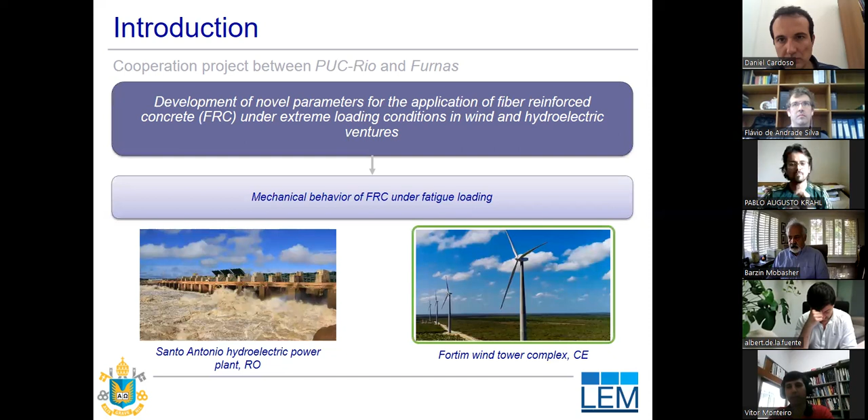This research is part of a major cooperation project between PUC-Rio and Furnas, which aims to develop novel parameters for the application of FRC under extreme loading conditions. This project was divided into two main branches: understanding FRC behavior under impact loading for hydroelectric power plants, and mechanical behavior under fatigue loading for wind tower endeavors, which is where my research project is part of.

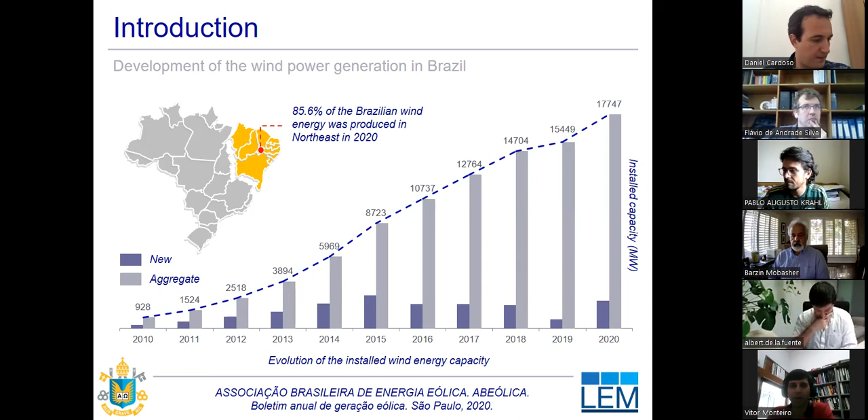There has been a major growth in the use of wind energy in Brazil over the last 10 years, with major growth in the production of wind power across our country. However, in the last 10 years, wind power generation has been majorly concentrated in the northeast of our territory, around 86% of all wind energy in Brazil is concentrated there at the moment.

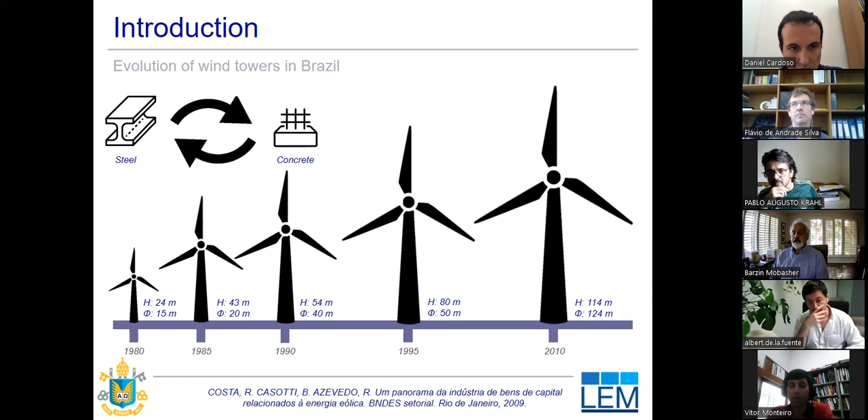In order to make those wind towers reach really high in the atmosphere and produce more wind energy, bigger blades and larger turbines are becoming bigger and bigger. Due to many problems in terms of vibrations from the high average speed of the wind, steel structures have not been the best option for construction of wind towers. Therefore, in the last decades, the major solution for this type of endeavor has been the use of reinforced concrete or pre-stressed concrete or a combination of both.

However, when we use reinforced concrete in situations with a lot of cyclic fatigue loading along the useful life of those structures, there is a major concern regarding cracking evolution and mechanical deterioration along those cyclic loadings over many years. Therefore, this research project aims to evaluate the use of fiber reinforced concrete and its mechanical behavior for this kind of application, and verify how fibers can mitigate mechanical deterioration along the useful life of those structures.

My research project was divided into five major sections. The research goes from the interface level, evaluating interface degradation at the fiber level, to mechanical characterization at the material level, and finally to verify the structural behavior under fatigue loading with additional fibers. Along our research, we also propose some novel models for FRC fatigue and evaluate the bond-slip behavior with some novel analytical equations.

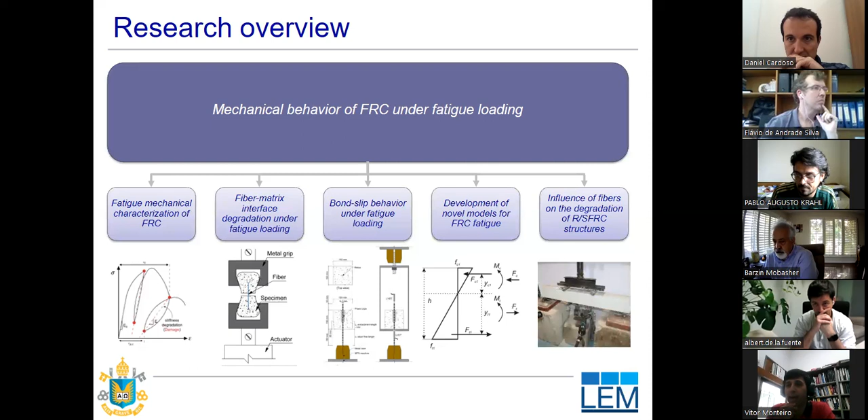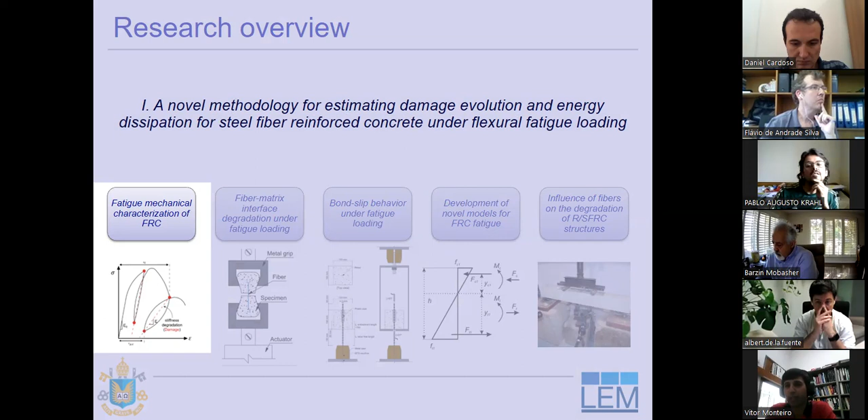For my first section, we'll bring the main results for the flexural fatigue loading of FRC at the material level.

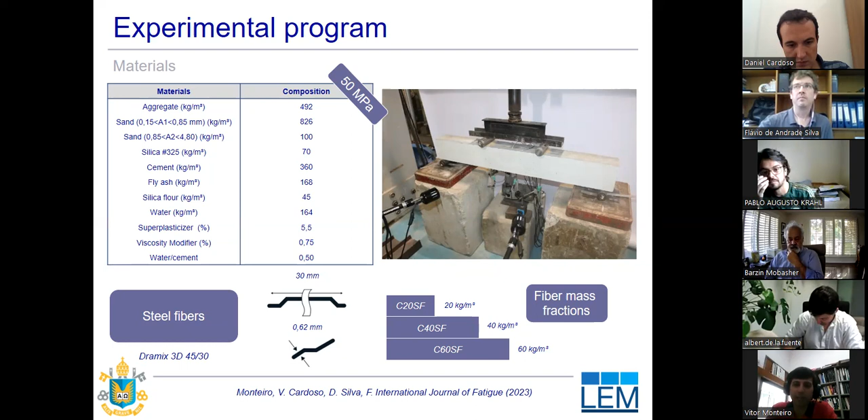Our experimental program is based on a self-consolidating concrete, which reached a mean value of 50 MPa after 28 days. This composition was used throughout our research project, presenting two types of sand, silica, fly ash, superplasticizers, and viscosity modifiers in order to reach the flowability needs. It also used a water-cement factor of 0.50. The steel fibers used were hooked-end steel fibers with 45 aspect ratio and 30 millimeters length. Three fiber mass fractions were added to the mix: 20, 40, and 60 kilos per cubic meter.

The experimental program to evaluate mechanical degradation at the material level consisted of pre-cracking the notched beams until reaching a CMOD of 0.50 millimeters crack opening. The beam was then unloaded, and the fatigue test began.

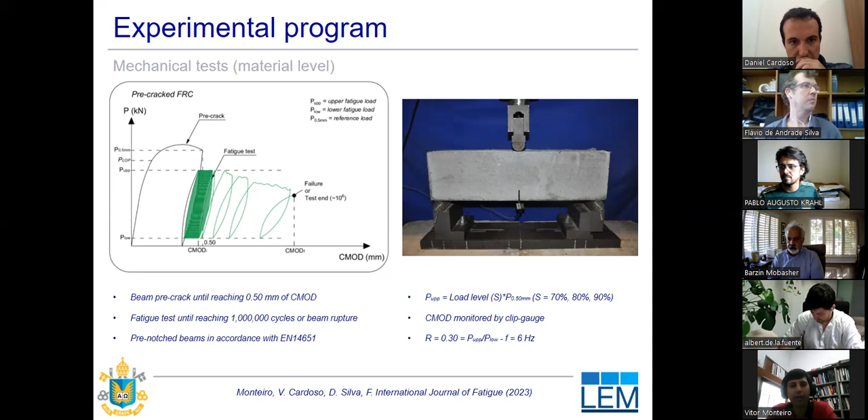The fatigue test consisted of oscillating the loads between upper and lower loads, where the upper load was a percentage of the flexural residual strength, either 70%, 80%, or 90% of the recorded load from the pre-crack at 0.50 millimeters of CMOD. Along the fatigue test, the CMOD was monitored and recorded by the clip gauge, and the fatigue tests were carried on until reaching 1 million cycles or beam rupture.

One of the first results we have for the beams under fatigue was the evolution of the CMOD. It's possible to verify for all load levels an almost linear increase in CMOD until reaching around 0.50 millimeters of CMOD. Then there is a sharp increase in the CMOD increase rate until the beam reaches its fracture.

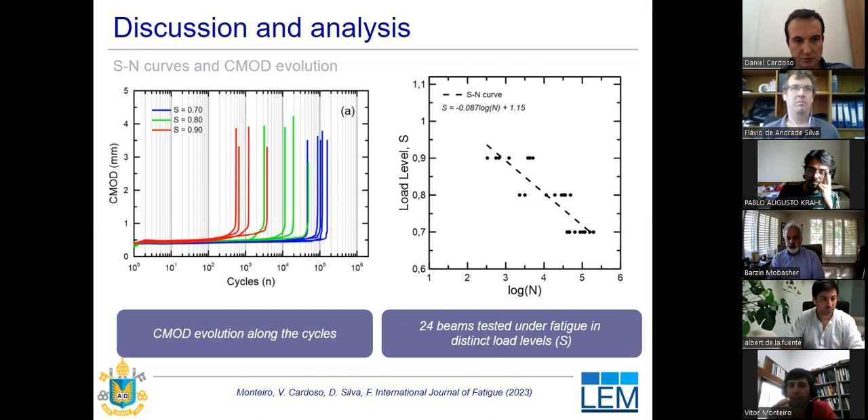Based on these first results, we could also develop the SN curve, which brings us a mean evaluation of the fatigue life of the material for the studied load levels. Then we can have a curve, a line that brings us these mean values of fatigue life.

However, more recent studies in fatigue life are already developing new methodologies to evaluate the fatigue life based on probabilistic methods. So for this research, I applied the Weibull distributions to study the fatigue life. Using the two parameter and three parameter Weibull distributions, we have built and developed curves that are based on failure probability, based on these probabilistic methods.

So we can have the fatigue life based on a failure probability. For a two-parameter Weibull distribution, we can reach a line based on a failure probability. And for the three-parameter distribution, we can have a nonlinear curve with an asymptotic behavior reaching the 0.50 load level.

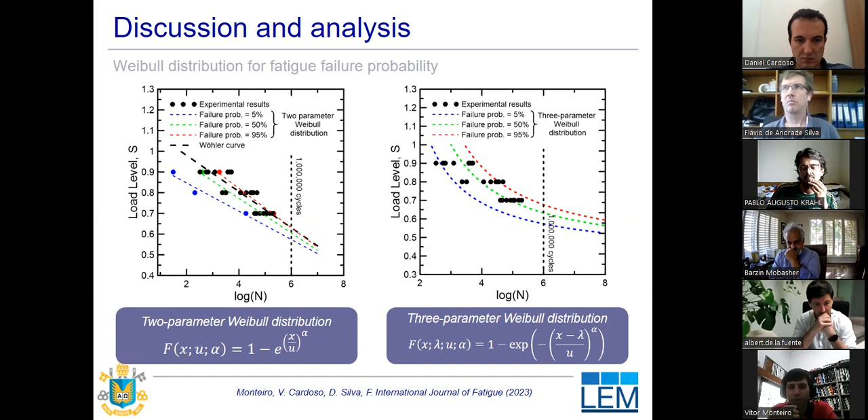The next step was evaluating the material degradation along the fatigue life. So we evaluated the material degradation in terms of stiffness and dissipated energy along the cycles. The stiffness was calculated as the slope of each of the cycles recorded, and the energy dissipated as the area inside each hysteresis loop.

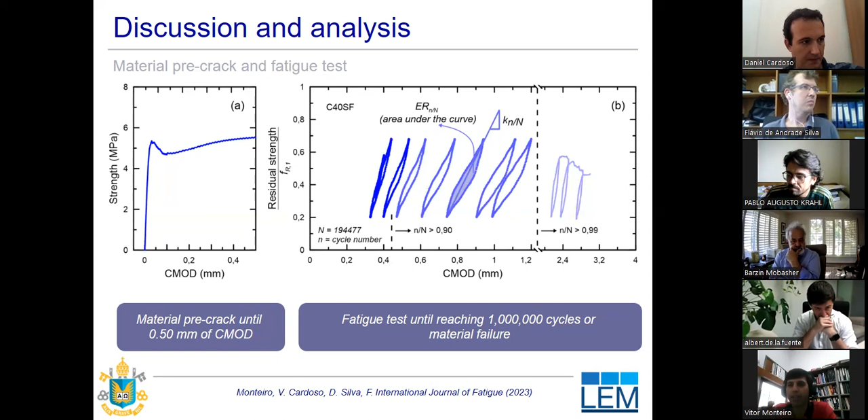Here we have the first graphs of stiffness decaying along the fatigue life. It's possible to verify an almost linear decay of the stiffness after the first cycles until reaching rupture. It's possible to verify that the stiffness is directly correlated with the residual strength, since the more fiber fractions in the material, higher stiffness is recorded. This makes sense because with more fibers in the cracked section, we have a higher flexural residual strength, which promotes higher stiffness of the cracked material.

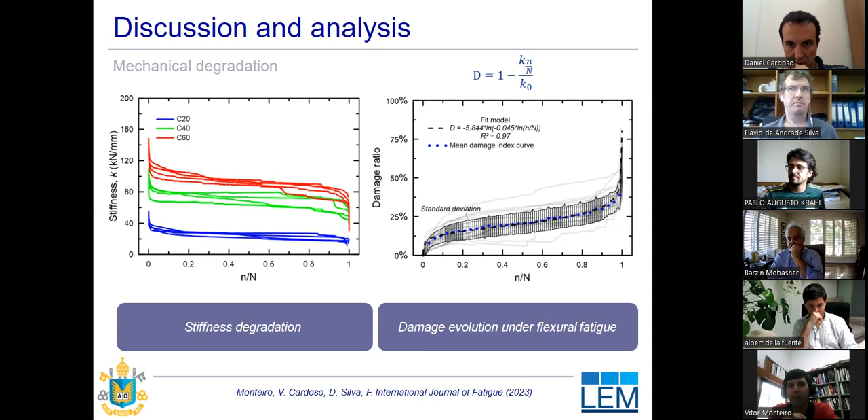With the stiffness decay, we can also propose some empirical equations to verify the damage in terms of stiffness along the fatigue life.

A similar approach was done for the energy release. Once more, we have this correlation with flexural residual strength with energy dissipated. So we have more energy dissipated along the fatigue life when we have more fibers in the cracked section. Once more, we also made some empirical equations to verify this energy release along the fatigue life.

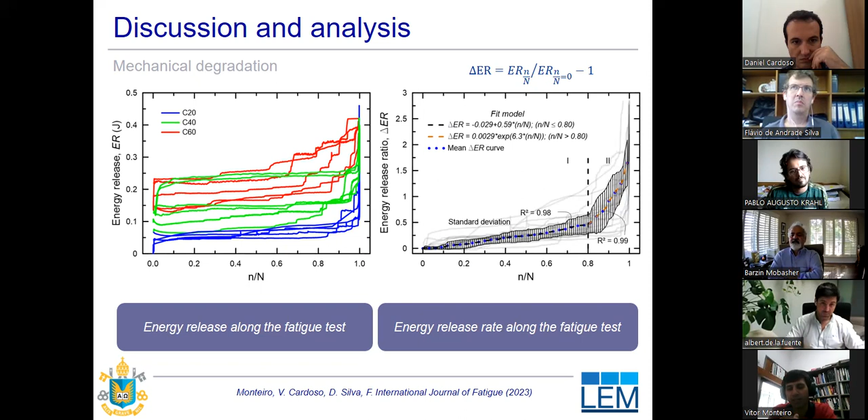Some of the main conclusions of this first section were that the Weibull distributions make a good fit, a good methodology to evaluate the fatigue life of FRC using probabilistic methods to verify the fatigue life, with a more powerful methodology than using only the traditional mean fatigue life analysis.

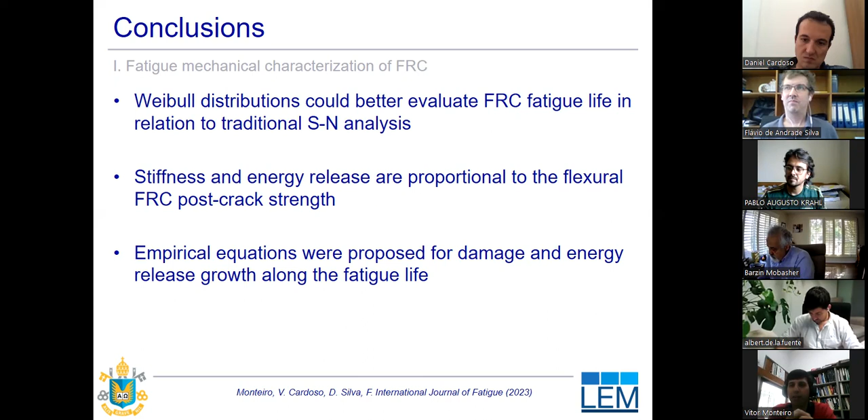It was possible to propose and verify the stiffness decay along the fatigue life and verify the influence of the amount of fibers on the stiffness along the cycles. And finally, we also propose some empirical equations to verify this degradation.

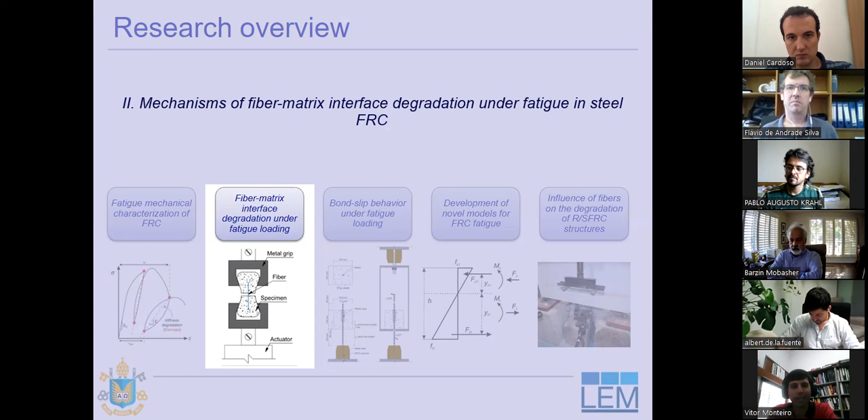The next session covers the degradation at the interface level, the fiber-matrix interface level, and how fatigue causes degradation in the interface between fiber and matrix.

The experimental program uses a pull-out test with dog bone shaped specimens. These are good since we can use an aluminum claw that provides a very good grip on these specimens. The fiber is positioned in the center of the specimen, and the tests were controlled with an external load cell of 5 kilonewtons.

The fatigue test has a methodology similar to what we already saw at the material level. First, there was a preload of the pull-out test until reaching around the bond strength, the maximum bond strength. Then the specimen was unloaded, and the fatigue test began, oscillating between the upper and lower loads, until reaching either a million cycles or failure in the interface. All tests were carried out at 6 Hz of oscillation frequency.

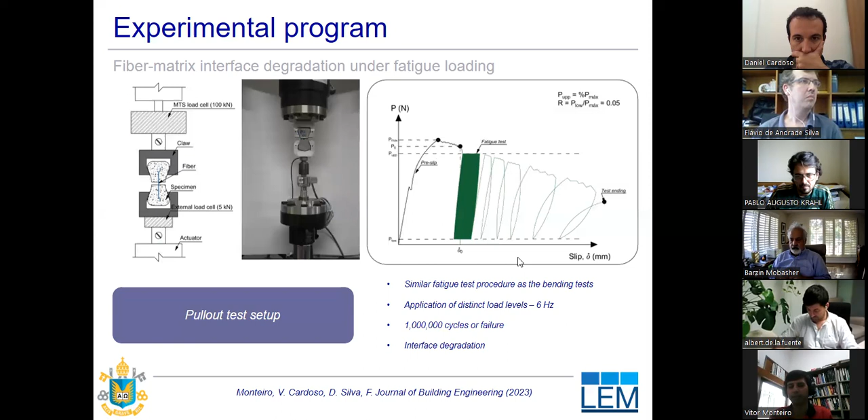One of the main results in interface degradation is that we could observe two major types of failure in this pull-out fatigue test: a pull-out failure or a fiber rupture failure. During the test, when we have a pull-out failure, we couldn't reach many cycles before failure. We could reach a maximum of 1,000 cycles before pull-out failure for both hooked ends and straight fibers. The pull-out failure is simply that the fiber is pulled from the matrix.

For the fiber rupture, we need more cycles for it to happen, and it's majorly controlled by the fracture or degradation of the steel wire inside the matrix. So one failure mode is controlled by interface degradation inside the matrix, and the other is controlled by degradation of the steel wire, which also degrades during the fatigue. The steel material degrades along the test.

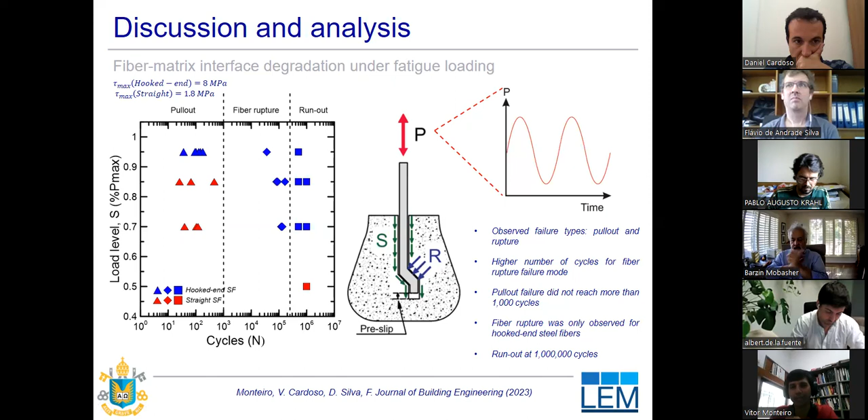So here we have to see how the pull-out failure happened. It was possible to verify a significant evolution of the slip. For the pull-out failure, we can see at the blue curve a slip evolution. For this kind of failure, we could verify that the hook of the fiber presents a straightening after the pull-out. During the degradation of the interface, this hook is being straightened along the fatigue life until it is completely pulled from the dog bone specimen.

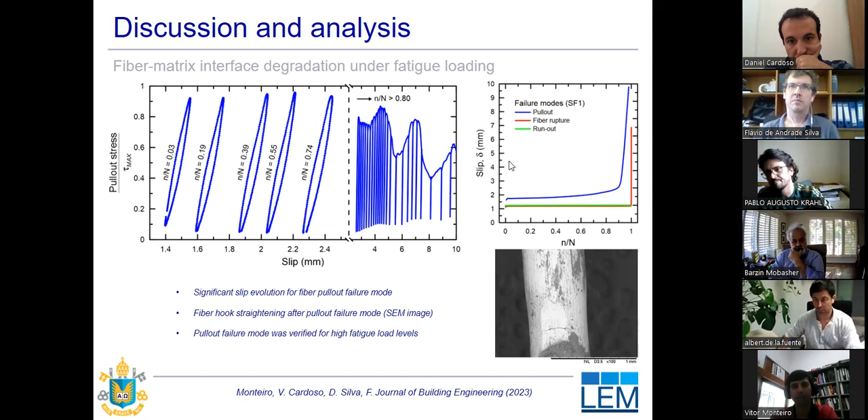For the next failure type, we could verify the degradation of the steel wire - the steel ruptures inside the dog bone specimen. It's possible to verify through the CT scan image that part of the hook is still inside the dog bone specimen after the fiber has fractured around the hook of the hooked end steel fiber. For this kind of failure, it's not possible to verify any significant slip evolution along the test. We can see at the red curve that there is almost no slip until the fiber reaches fracture, and then the fiber is pulled from the matrix.

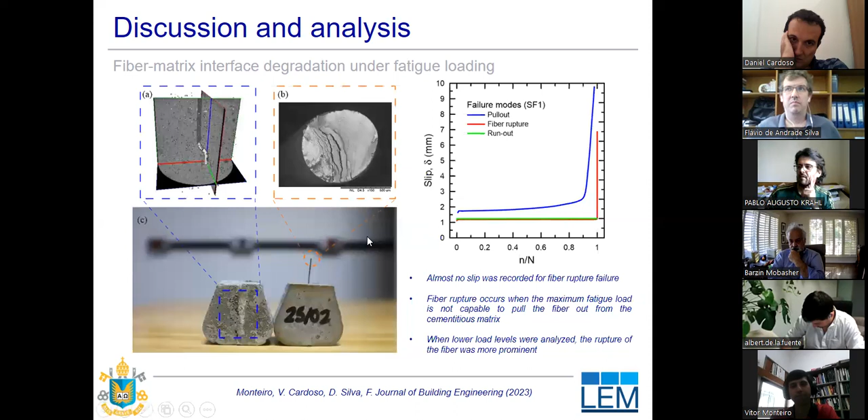So one of the major conclusions we can take from this fatigue test at the interface level is that we have two major distinct failure modes: fiber failure and fiber pullout. There is a clear division in terms of number of cycles for each failure mode. For pullout failure, we have a small number of cycles. For steel wire failure, we have a higher number of cycles since it's controlled by fatigue and degradation of the steel material. When the fiber is pulled out from fatigue loading, the hook is progressively straightened along the fatigue life. In the case of fiber rupture, the steel wire fractures, and then the fiber is pulled from the matrix.

Now we go to the next section, which covers the bond slip behavior under fatigue loading. I will also present the development of some analytical equations for the analysis of the bond slip behavior of rebars in FRC matrix.

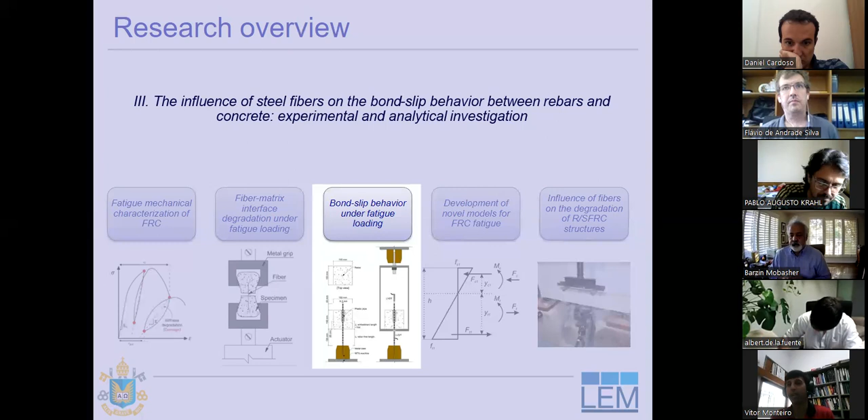So first, the experimental program: we have rebar pull-out tests. We carried out quasi-static pull-out tests of the rebar in the FRC matrix, to evaluate the rebar-concrete interface characterization. We used a rebar of 6.3 millimeters, with 60 millimeters of bond length, which is around 10 times the rebar diameter. After the experimental program, we also applied some analytical models to verify the bond slip behavior in the quasi-static mode.

Then we have the fatigue pull-out tests, with a similar approach. The test oscillated between upper loads and lower loads. The upper load is a fraction of the maximum bond strength recorded from the quasi-static tests. So we had load levels of 50, 80, and 90% of this bond strength, oscillating between this range of loads until reaching a million cycles or failure of the specimen.

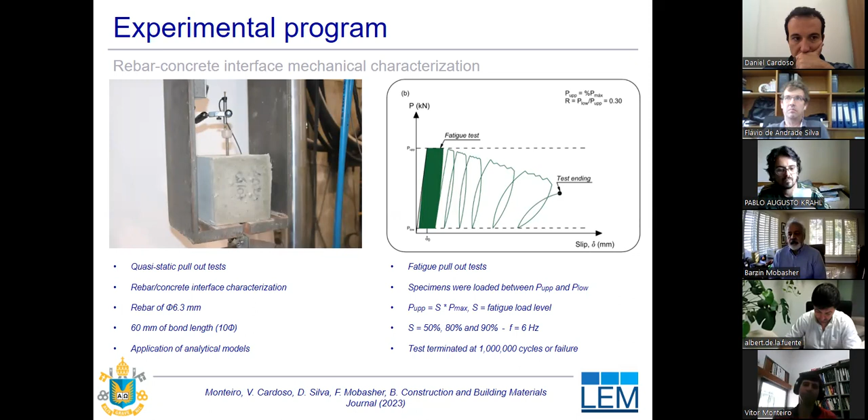Before presenting the results, I would like to give an overview of the analytical models applied for the quasi-static tests. These models try to evaluate the bond slip behavior through three distinct stages. The first stage is the elastic stage, where there is a perfect bond between the rebar and the concrete. Then there is the non-linear stage, where an unbonding length progresses until the complete bond length is unbonded from the concrete. Stage three is characterized by the dynamic motion of the rebar - a rigid body motion of the rebar coming out of the concrete matrix. In order to make this model work, we need to define the shear stresses along the bond length.

So we have the maximum elastic strength, which is presented here after a linear evolution of the strength. Then we have the frictional strength, which is associated with the unbonding of the rebar from the concrete matrix.

After the complete embedment length is unbonded from the concrete, we begin the dynamic stage, in which the rebar is pulling out from the matrix with an almost constant dynamic shear stress, coming out with this value of delta D, the amount of rebar already pulled out from the specimen. After applying those shear stresses for different slip values, we can calculate the bond force in the interface and obtain the load-slip curve presented in this figure.

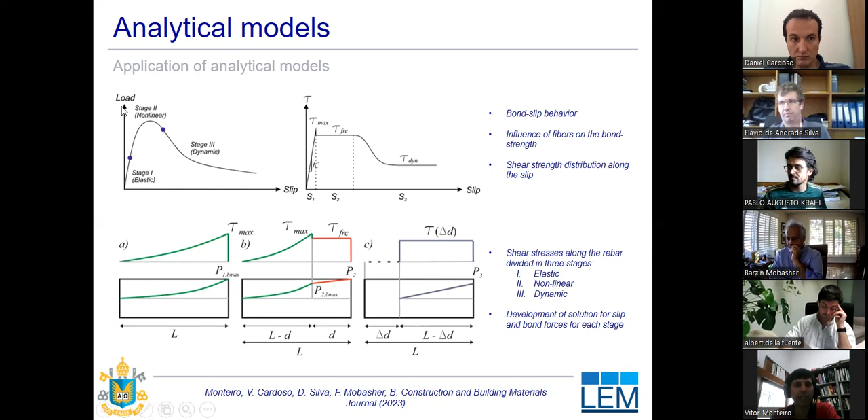So we applied the model for different results in the literature and also from the experimental results carried out in this research. We could observe a very good fit. The use of the proposed three stages for the pullout presented very good fit with the experimental results.

The analytical model was applied changing parameters from the literature results. Distinct parameters were changed, like the rebar diameter, the fiber fraction, the bonded length of the rebar, and the compressive strength. Changing those parameters, we applied the analytical model, and it presented a very good fit for changing those four major parameters in our model.

Based on the results from the literature and from this experimental campaign, we could also make an empirical equation to evaluate the maximum bond strength for the rebar in the FRC matrix, and try to correlate empirically the maximum bond strength based on those material and geometrical parameters.

Some of the major limitations of this analytical model are related to the concrete cover. We know from the literature that the concrete cover on the rebar increases the confinement and enhances the bond strength, but the model is a 2D model and cannot use this third dimension of the cover and its influence on the bond strength. So we cannot include this important parameter in the model.

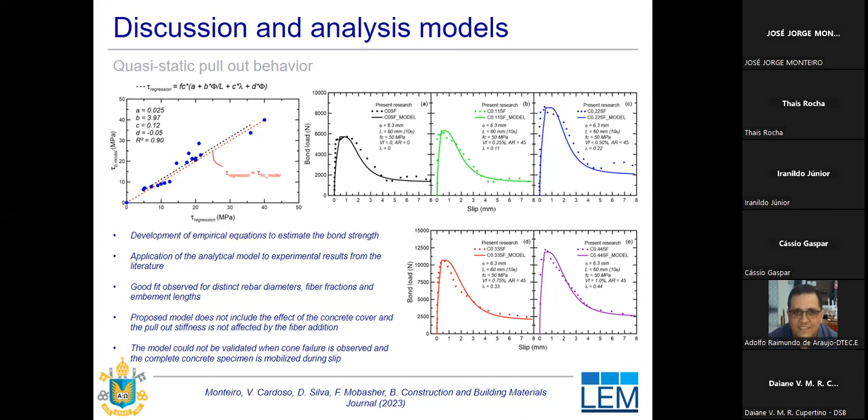A second limitation is based on the type of failure. This model assumes that we have an interface degradation, meaning only a small ring of concrete is mobilized during the pullout. So we have an almost perfect pullout of the rebar with the presence of really small cracks on the top surface when the rebar is being pulled out from the matrix.

This is also a limitation because sometimes we can verify very large cracks in this kind of test, but this model could not be applied because it does not assume that a very large area of concrete is being mobilized during the pullout. Another limitation is that the fiber addition is not influencing the pullout stiffness along the test, because it is mainly controlled by the concrete area, and we could not capture the influence of the fibers in this initial stiffness.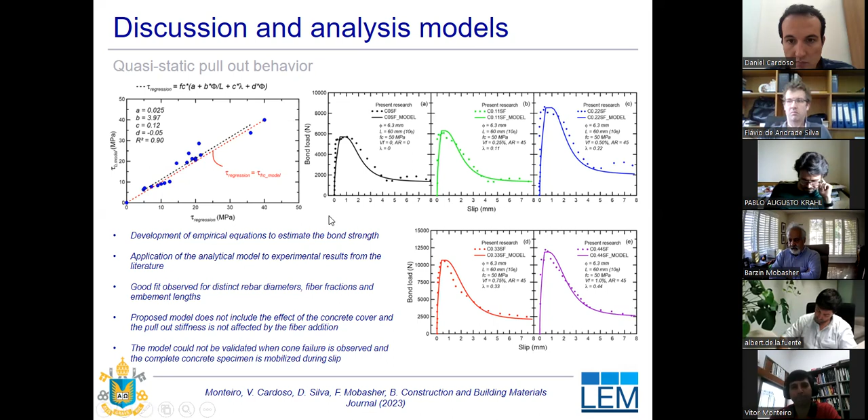The next step is to bring in the degradation of the pullout, the bond slip along the fatigue test. The major way we verified to study the degradation of the pullout is through the slip evolution along the fatigue test.

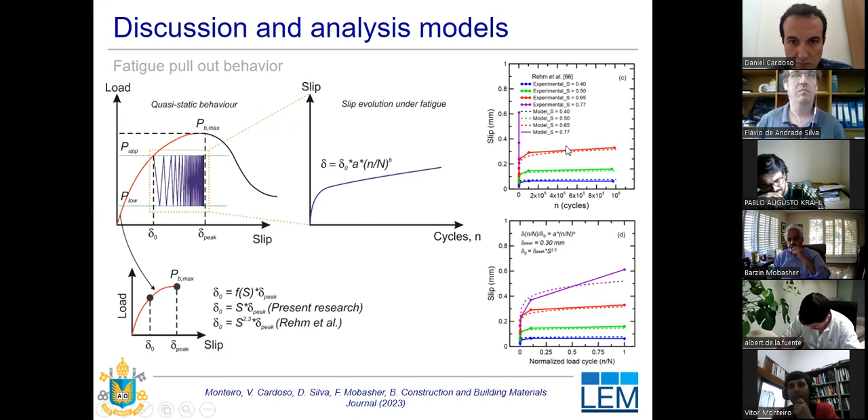One of the major conclusions we could evaluate in this section is that the analytical model for the bond slip presented a good fit for the experimental parameters we studied, such as fiber fraction, bond length, compressive strength, and so on. So it presented good results.

The analytical model could make a good fit, a good way to evaluate the quasi-static behavior. It has some limitations that I have already discussed along the presentation.

We also could evaluate the slip evolution, which characterizes the degradation of the interface between rebar and concrete under fatigue. We could evaluate it in terms of empirical analytical equations, the bond slip behavior, and also the pull out under fatigue loading based on those mathematical equations.

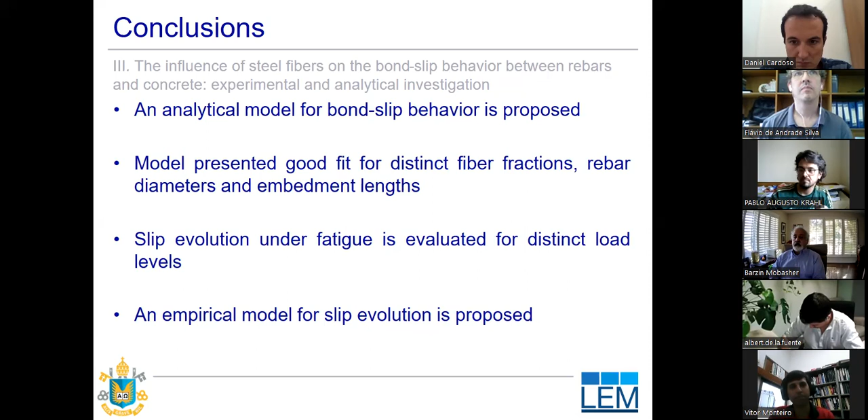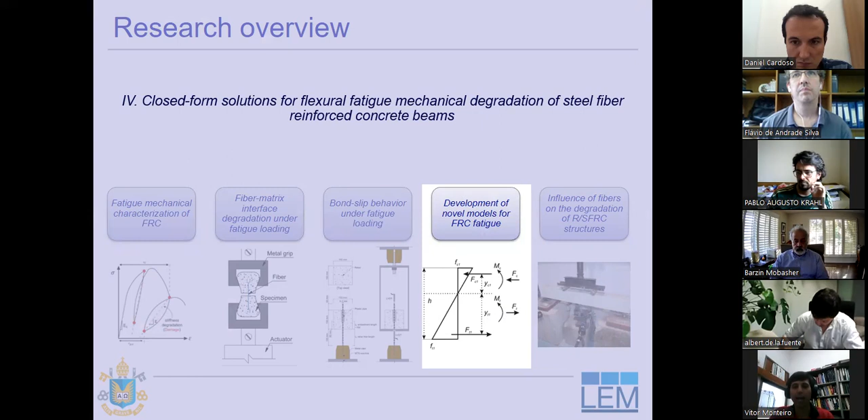So the next step is to bring an overview of the closed form solution models for FRC fatigue that we could also analyze along this PhD research.

The first step to analyze the closed form solution is to analyze the analytical equations in terms of the quasi-static behavior. This is the first step.

The models need to have a good application of the constitutive relations. So for compression of the FRC, we use an elastic plastic behavior. And for tension, we use a quad-linear model, which has four lines representing the pre-peak and post-peak behavior.

Of the FRC in tension, it's possible to verify that the post-peak is mainly analyzed in terms of adimensional parameters, which are all calculated as a function of the cracking strain and stress. So the post-crack stresses are calculated as a function of the cracking stress, and the same is done for the strains.

After the constitutive relations are carefully analyzed, we can go to the stress-strain distributions and calculate the stresses along the crack section of the FRC. We assume linear strains, Kirchhoff hypothesis, and assume that the flexural rupture of the beam is controlling the main mechanical behavior of the FRC at the material level.

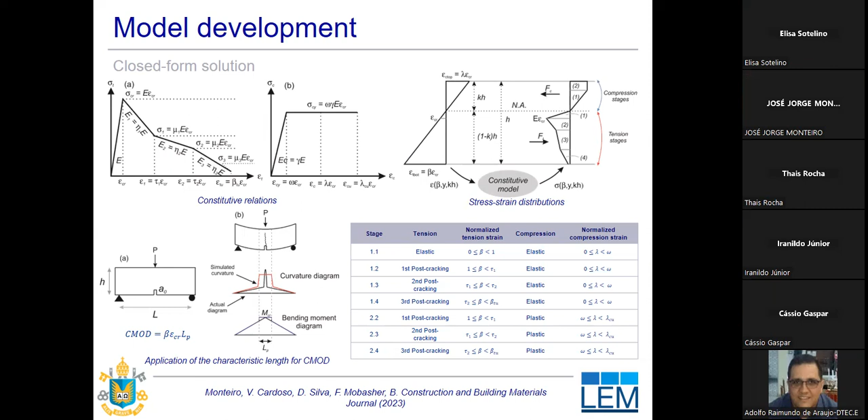So how can we go from the stress-strain domain to the stress-CMOD domain? This is a key correlation that we need to make to evaluate the CMOD in this kind of test.

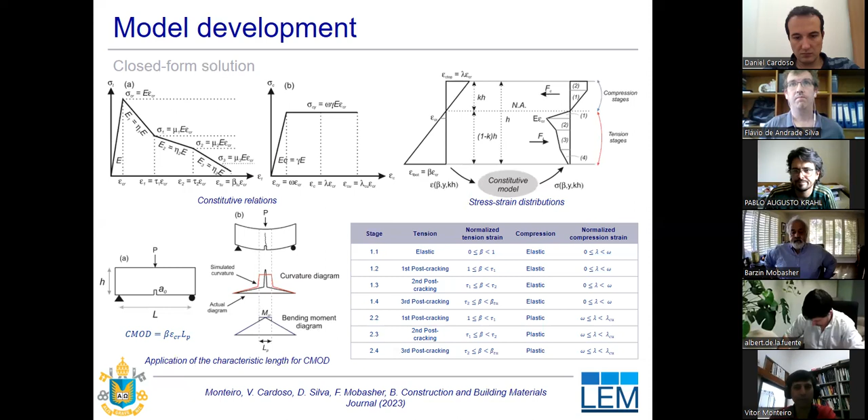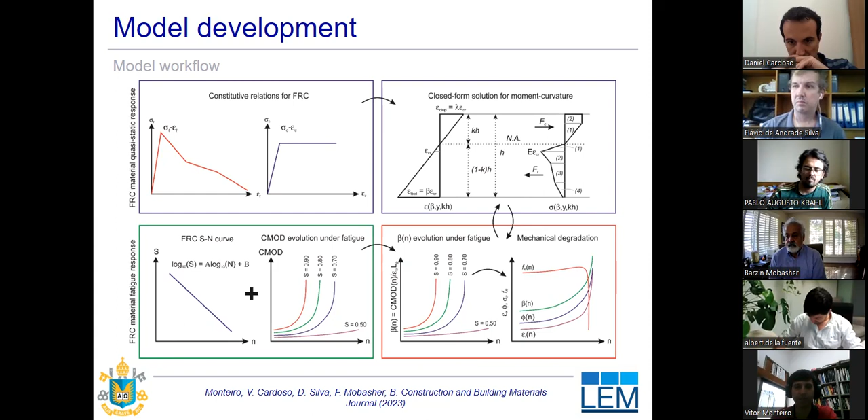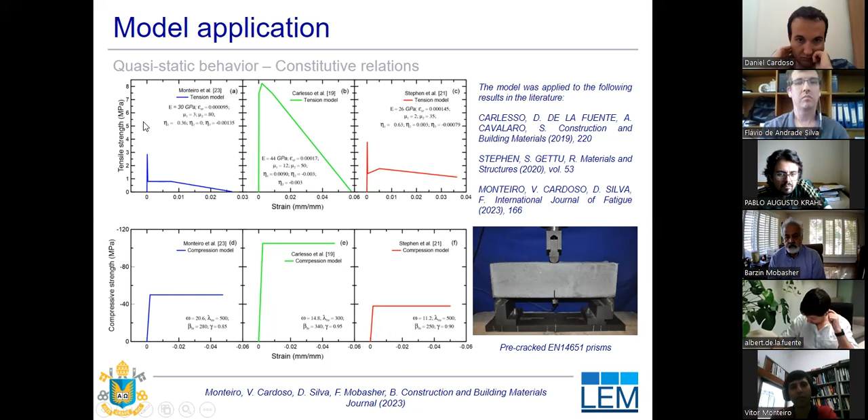Now I'm going to bring the application of this model workflow for some results in the literature. We have the tensile strength results from Monteiro, Carlesso, and Stephen. We applied the constitutive models on tension and compression, using the elastic plastic compression model and the quad linear tension model for the studied authors.

After that, we can verify if, after using the constitutive models, they have good fitting with the experimental results in terms of load CMOD for the studied authors. We have for the three studied authors a good fitting of the analytical equations for Carlesso, Stephen, and Monteiro. We could verify a good fitting with the experimental results, so the closed form solutions are valid for the quasi-static behavior. The next step is to use as input for the model the SN curve.

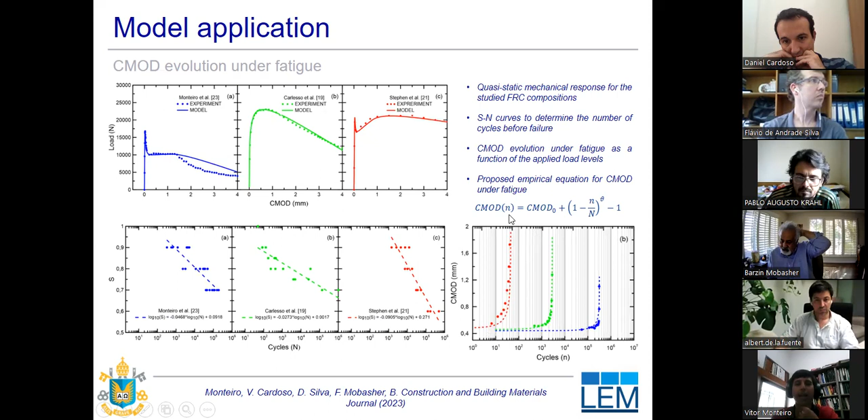So we have the SN curves for the authors, and the next step is to evaluate how CMOD evolves along the fatigue life. We propose an empirical equation, shown here, which uses the initial CMOD, the cycle index, and an exponent based on the load level, fitted to the experimental results we have from the lab.

After we have the SN curve, the CMOD evolution, and the closed form solutions, we can study how the other mechanical parameters evolve under fatigue loading. We can verify the evolution of the crack length, which is a fracture parameter, how the tensile strain evolves under fatigue, the residual flexural stress, and any other parameter calculated through the closed form solution. So after this parameterization, we can go from CMOD evolution and calculate the rest of the parameters.

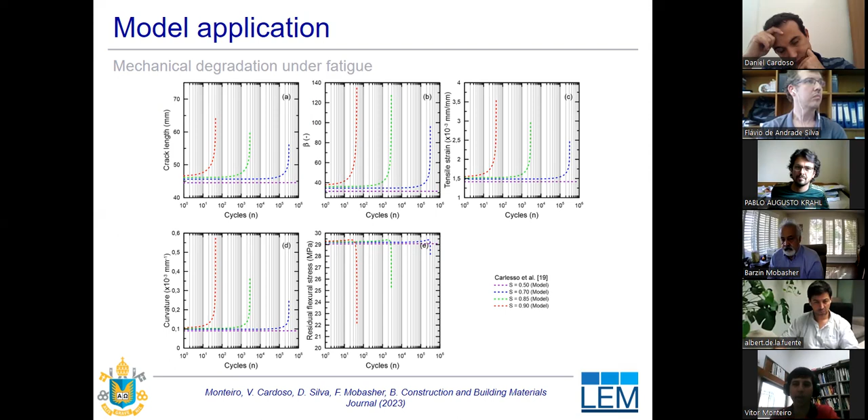As conclusions for this section: the quad linear constitutive model was a good fit for the quasi-static results, so the quad linear tension constitutive model was successfully used in this analysis. The proposed empirical equation for CMOD also presented a correct fit for CMOD under fatigue, and the closed form solutions were used to estimate the other mechanical parameters' evolution along the fatigue life.

The major limitation of the model is still the crack evolution, since we used an empirical equation, it needs to be calibrated for any kind of material we are studying, as it is empirically based on past results. Therefore, one major limitation is based on this degradation of the CMOD, and probably the major next step after this research is developing a more adequate and robust approach based on fracture mechanics to evaluate how the crack and the CMOD evolve with fatigue loading.

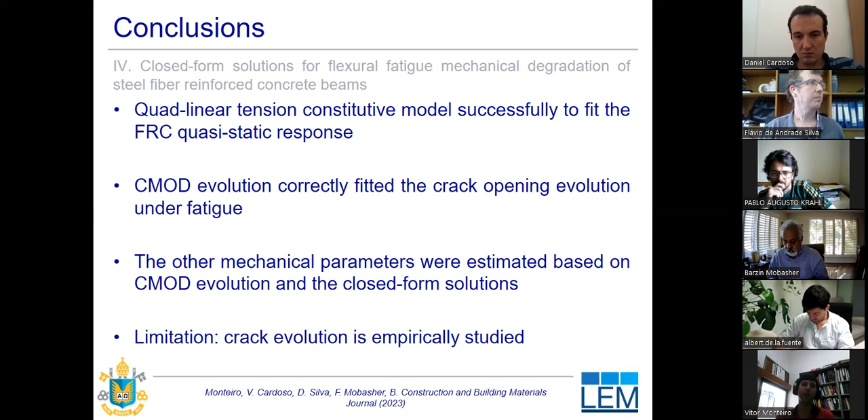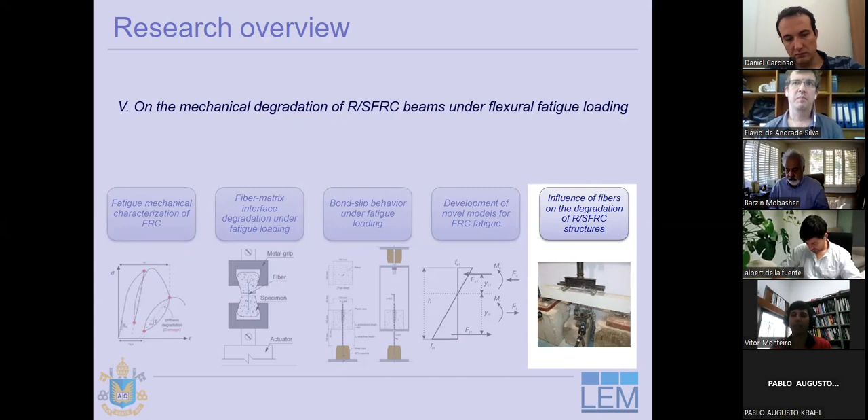Finally, the last section: I'm going to bring some results for the structural level and verify how the structure, a reinforced concrete structure with the use of fibers, degrades and mitigates along fatigue loading. The experimental campaign was based on a reinforced concrete beam, designed to present its rupture in flexure.

We attached many concrete strain gauges along the top face to verify how the compression strains evolve along the fatigue test, and also gauges on the rebars to verify how the rebar strains evolve under the cyclic loads. We also put some LVDTs to verify deflection along the test, and here is how the tests were carried on.

We first made a pre-crack on the beam until reaching 50% and 80% of the rebar yielding strain. The rebar yielding was measured with the strain gauges until reaching values of 1,900 and 1,200 microstrain. The test was stopped by unloading, and the force recorded at those strains was saved and used for the fatigue test. So the upper load was the recorded load at reaching those percentages of the rebar yielding strain.

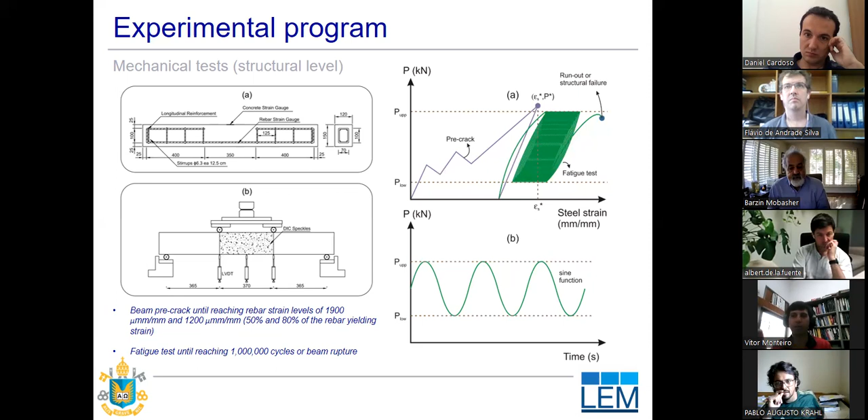The tests were carried on until a million cycles or the beam rupture. We also performed digital image correlation analysis to verify how cracks were oscillating along the structural fatigue tests.

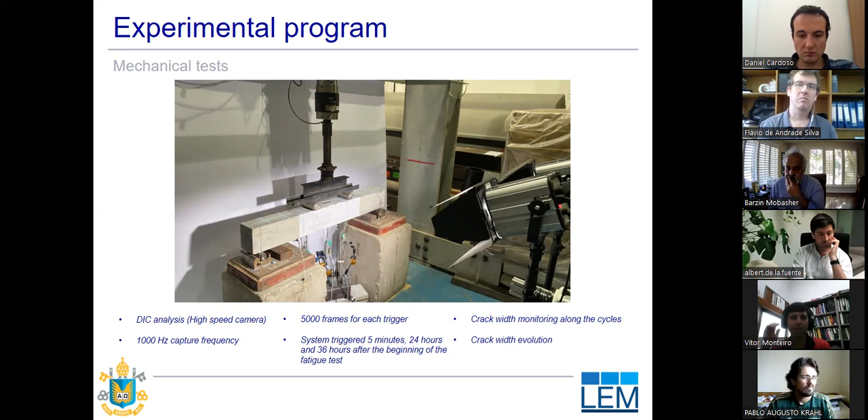The high speed cameras could capture 5,000 frames for each trigger, since the beam is oscillating at a very high frequency, 6 hertz, so we could only evaluate how the cracks are oscillating with high speed cameras. We used 1,000 hertz capture frequency in this test, and the system was triggered after 5 minutes, 24 hours, and 36 hours after the beginning of the fatigue test.

So we have some of the first results. We can analyze in the first graph how the steel rebar strains are evolving for concrete without the use of fibers, and in the next graph, we have the reinforced concrete with fibers.

It's possible to verify a major evolution in the rebar strains, especially without the addition of fibers. Both beams were subjected to the same loading range, from approximately 4.5 to 15 kilonewtons. So without the use of fibers, the beam reached rupture and presented a major evolution in the rebar strain under fatigue.

The addition of fibers is responsible for redistributing the stresses around the tension zone and mitigating the rebar strain evolution along the fatigue. So the fibers were successfully applied in order to mitigate the degradation of the rebars, preventing them from reaching rupture, even at the same load level compared to the reinforced concrete without fibers.

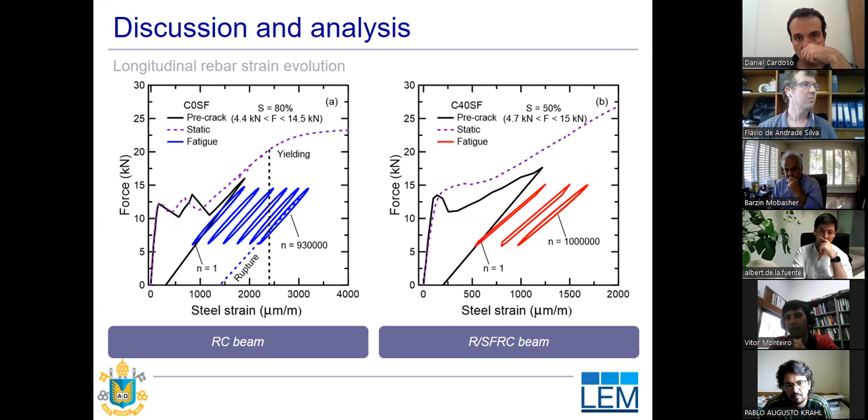So here we have the summary of the results of the rebar strain evolution. We can see that a major rebar strain evolution takes place when we have no fibers added in the mix, until the beam reaches its rupture.

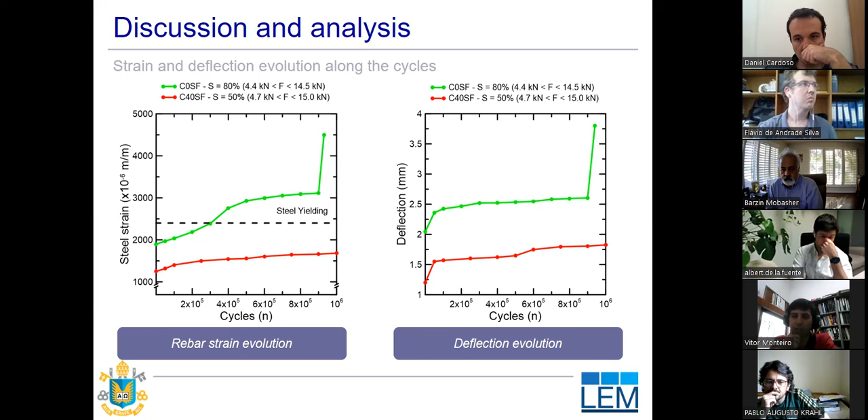The same phenomena can be analyzed for deflection, since the use of fibers can enhance the stiffness of the reinforced concrete structure and diminish the deflections of the overall structure along the fatigue life.

Now we have the stiffness decay. Once again, with the use of fibers, we have higher values of stiffness along the fatigue test.

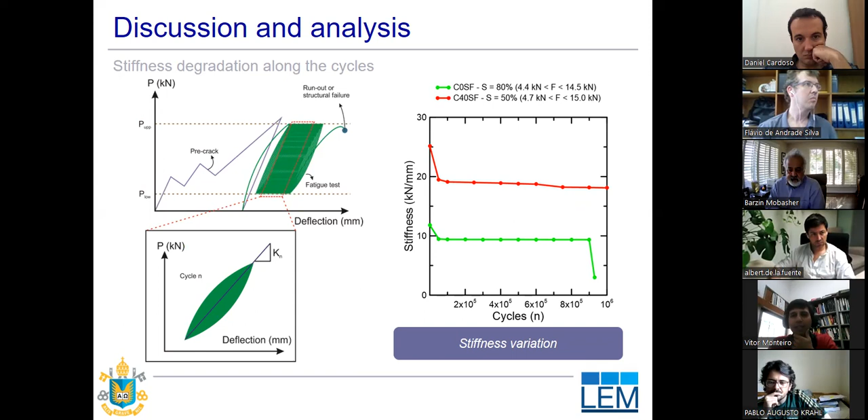Here we have a small video showing the oscillation of the major observed crack on both beams, with and without fibers. So we can see how the crack is oscillating along one of the cycles, one of the triggers we did in the lab.

It's oscillating between approximately 0.30 and 0.15 millimeters. We could evaluate that with the digital image correlation system using the high speed cameras.

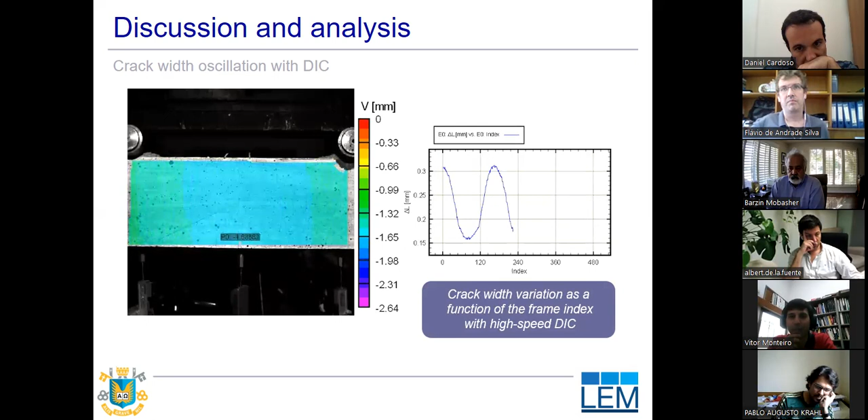So here we have the cracks evolving along the test. Once again, the redistribution of stresses with the fibers is diminishing the crack width along the fatigue test. So the fibers were successfully applied in terms of mitigating the crack propagation evolution in the structural beams.

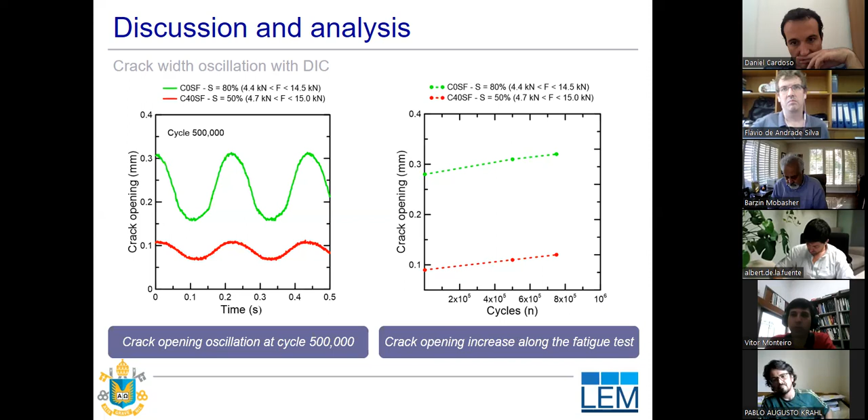One of the main conclusions we can draw in this last section is that the rebar strain evolution controls the overall fatigue behavior of the beam. So when we have more rebar strain evolving in the structural tests, that's a possible way to evaluate how the structure is degrading along the cyclic loads.

The addition of fibers could significantly influence the rebar strain evolution, mitigating the deterioration of the structure by redistributing the stresses in the tension zone. Similar mechanical deterioration was observed, but it was mitigated with the use of fibers, so it could mitigate the major mechanical parameters of the concrete beam under fatigue loading.

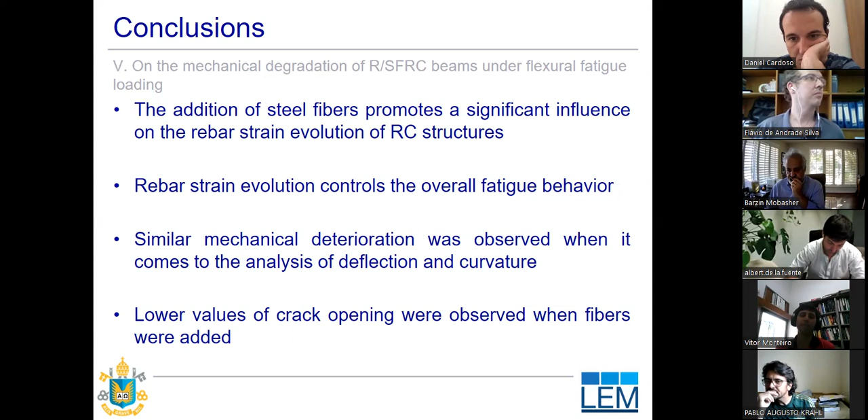So some final comments to finish my presentation. We could evaluate the FRC degradation at different levels, going from the fiber to the material and structural levels to evaluate the degradation of the FRC in major aspects.

We could also propose some novel methodologies and equations, analytical and empirical, to study the mechanical degradation of FRC, and they were all in general successfully done and fitted with the experimental data.

We still need more information on crack growth of FRC in terms of studying more refined fracture equations that can bring more information on how cracks evolve along the fatigue life. This is a key aspect to evaluate the degradation that is still missing in this research project and can be done in future studies.

Also, novel models can be proposed for the mechanical degradation, especially at the structural level. We could propose many equations and results at the material level. Now we need to go to the structural level and also try to propose new equations there.

This PhD thesis is just the kickstart of a series of other works that are going to come in the next years by our other colleagues here in the lab, who are also studying fatigue of FRC.